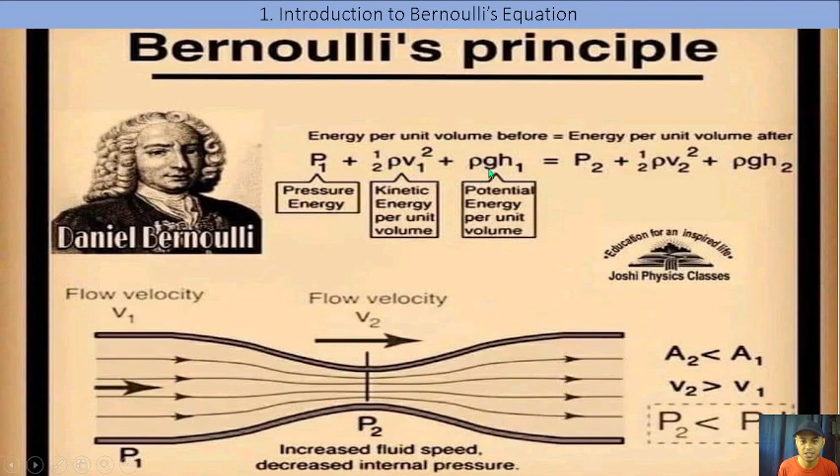So we will be discussing Bernoulli's principle. Grabe ang haba ng mga formulas na yan, pero madali lang naman yan. Depende sa given, di ba? Okay, so we have here pressure. We have density times velocity to the power of 2. We have density times gravity times height. That is potential energy. This is kinetic energy. Then ganun din sa kabila.

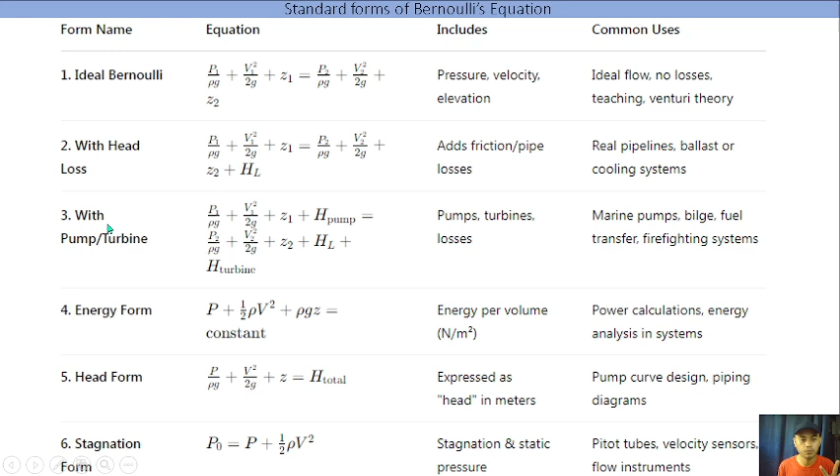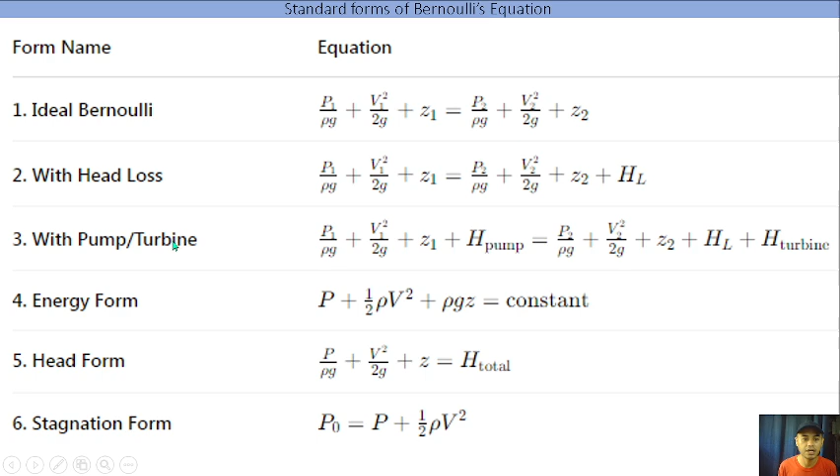Okay. So let's go directly. These are the standard forms of Bernoulli's equation. So on this slide, yung focus natin is dito sa pangatlo siguro. Dito tayo magpo-focus sa pumps. Okay? So this will be our formula. This one, number 3, pump. So pag pump, matatanggal na tong H turbine. Tatanggalin natin yan kasi wala nang turbine. Pump lang tayo. So we will just use this formula for the meantime.

Okay. So, assumptions and limitations of Bernoulli's equation. Kailangan yung fluid is incompressible. The flow is steady. The flow is inviscid. No energy loss due to friction. The flow is along a streamline. Pero sa marine engineering, some real-world conditions such as friction losses and turbulence must be accounted for using correction factors like the head loss equation.

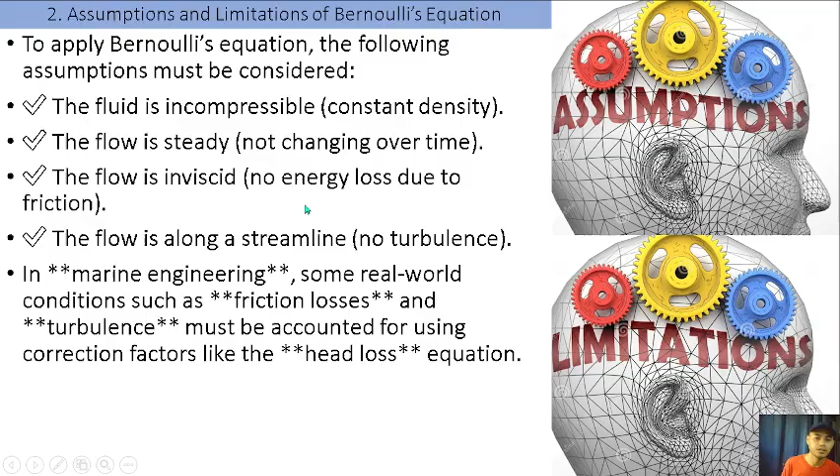Okay. So, applications of Bernoulli's equation in marine engineering. First, for the valve and piping flow. So, yung flow dyan, gagamit natin yung Bernoulli's equation. So, pressure drops in pipelines are analyzed using Bernoulli's equation. Helps in designing marine fuel, cooling and bilge water systems, used to determine flow velocity and pressure losses in different pipe sections. So yung mga losses natin dyan, kailangan natin malaman kung ilan yung flow na dumadaan dyan sa ating mga pipes.

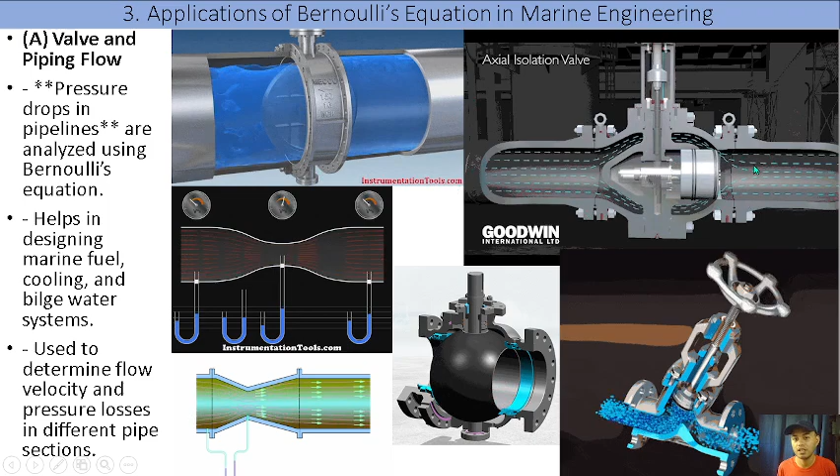Okay, another application of Bernoulli's equation is in pump flow characteristics like this one. So this is the pump. So Bernoulli's principle is used to evaluate suction and discharge pressure. Maybe this is a pump or a blower. So in centrifugal and reciprocating pumps. So helps in calculating net positive suction head to prevent cavitation in marine pumps.

So to calculate for the pump flow natin dito, meron tayong formula which is, we have here the P1 over the density of the liquid times the gravity, plus the velocity, V1 to the power of 2 divided by 2 times gravity, plus H1, ito yung head, or potential head, plus yung malaking H, ito yung pump head. So, given yan, or maybe yan yung isolve natin, depende.

Is equals to the pressure on the discharge, P2, over density times gravity, plus velocity to the power of 2 divided by 2 times gravity, plus H2, plus HL which is the losses. H2 is another potential head. Ito yung head natin. So that will be our formula.

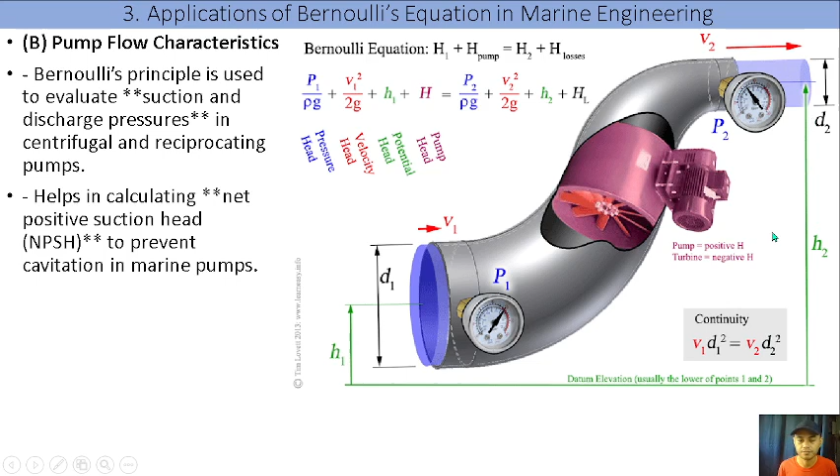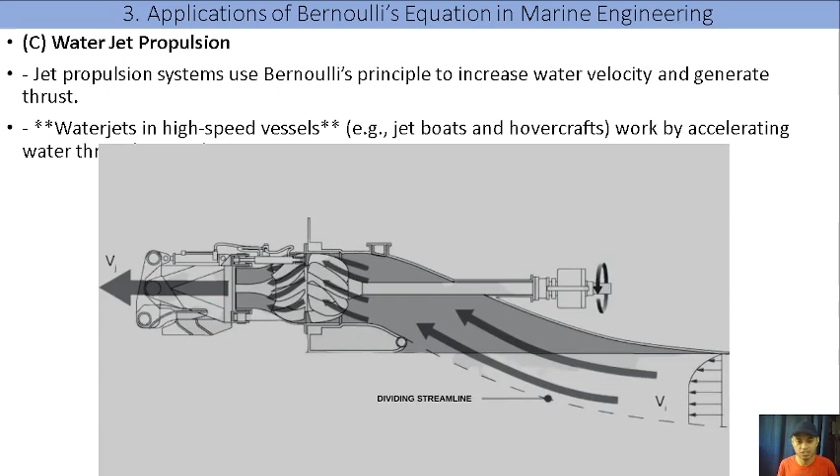Okay, another application of Bernoulli's equation is sa water jet propulsion, ito yung ginagamit ng mga OceanJet, ng mga SuperFerry, SuperCat. Yung mga fast craft ng ferry boats. So, using this one, parang may nozzle dito na paghigop niya, binubuga niya dito at high velocity. Para siyang inipit mo yung nozzle ng fire nozzle natin. So, sisirit talaga yung tubig paglabas dyan.

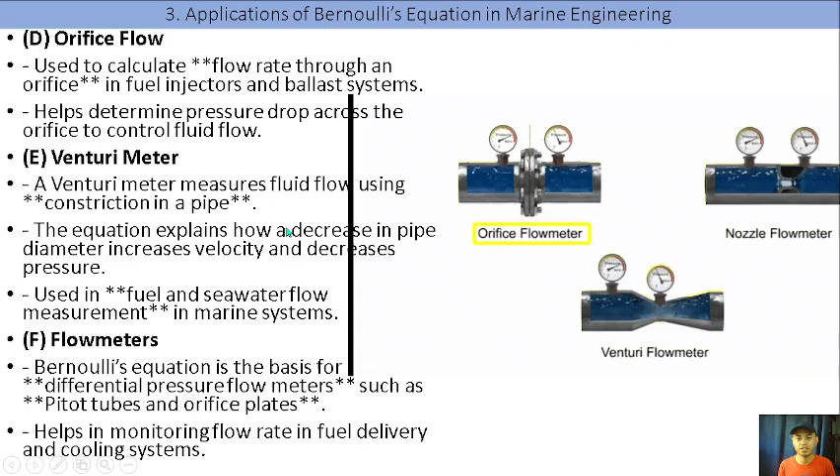Okay, another application of Bernoulli's equation is the orifice flow. Ito yung orifice. For our Venturi meter and for other flow meters. So these are different types of flow meters. Wala ata dito. Maybe sa next slides pa yan. Okay, and the different flow meters, ginagamit din yung Bernoulli's equation.

Okay, so let's continue. Let's start with the formula, problem solving. So this will be your formula, P1 over rho g plus V1 squared over 2g plus H1 is equals to, ganyan. Incomplete na ito. So, ito na lang yung gagamitin natin.

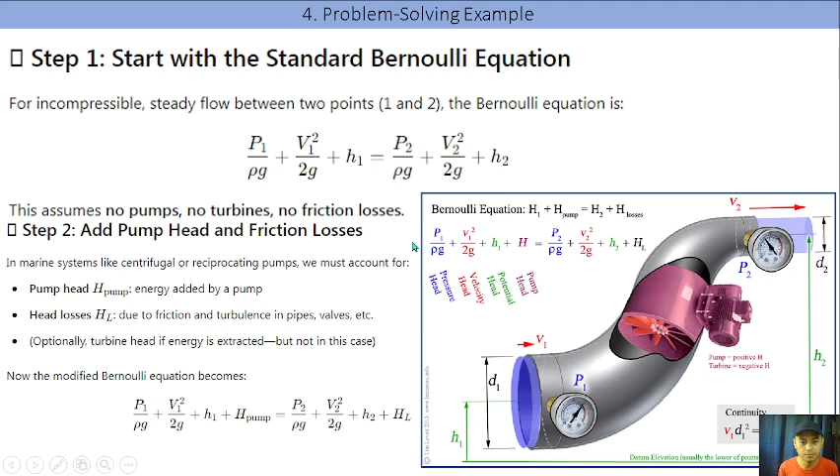Plus H. Okay. So, yung problem natin dito is, let's go. So, these are a problem. We have density of 1,000 kilograms, so this might be fresh water. Gravity of 9.81 meter per second squared. D1, which is ito, diameter ng ating pipe is 0.15 meter with an H2 of D2 diameter outlet, which is 0.10 meter.

Also, we have the H1, this one. H1 yung head natin, potential head, which is 1.5 meter dito. And then, potential head dito sa outlet is 4.0 meters pala. Okay. The pressure here is given naman din, 100 kilopascal. And then, the pressure 2 is also 300 kilopascal. So, given na rin siya.

So, HL natin, yung head loss natin dito, ito HL, losses. Head loss natin is around 2 meter. And then, yung flow rate, volume flow rate natin is 0.01 cubic meter per second. So, yan yung mga given natin. So, how do we solve this? First, we have to get the velocity. So, para makuha natin yung V, we will use the formula Q is equals to AV.

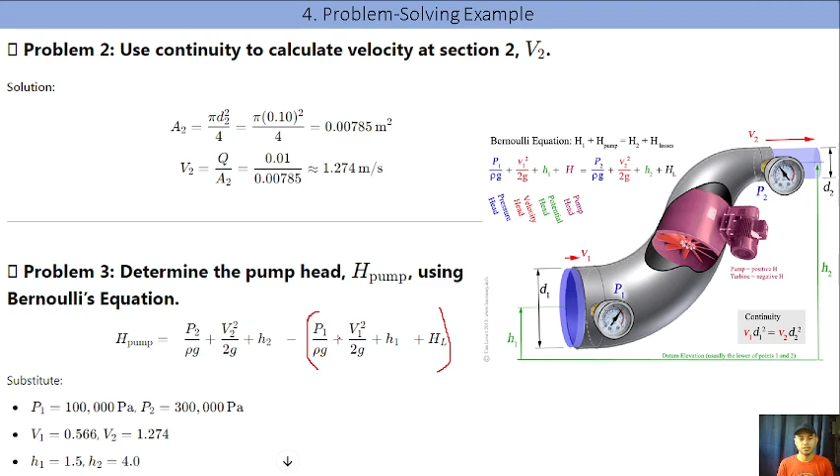So, pag nakuha mo yan, or you will put a parenthesis here. Ano ba to? Wait. Okay, sulatan natin. Okay. Or, kung naka-add yan, lagyan mo ng parenthesis dito. I-add mo yan lahat. Minus mo siya dito sa unang mga. So, and then after that, you compute using the calculator, and then you will get an answer. I'm not sure if this one is correct, kasi walang parenthesis nakalagay. Kailangan may nakalagay dyan na parenthesis. And then, use your calculator na lang to double check if tama ito or mali.

Okay? So, be sure, kailangan i-practice mo yan sa bahay, and then, i-calculate mo talaga using your own calculator. Do not focus on this slide alone.

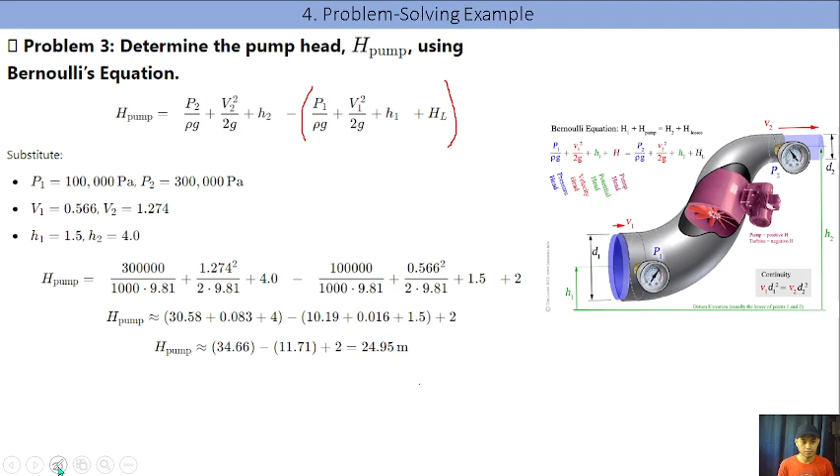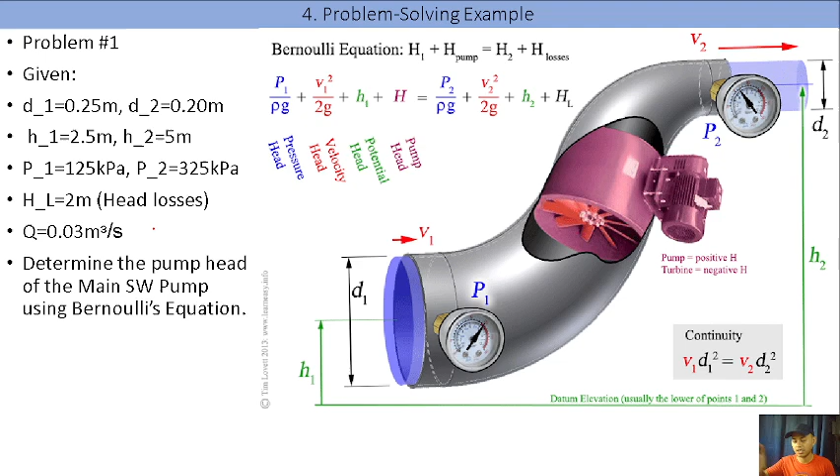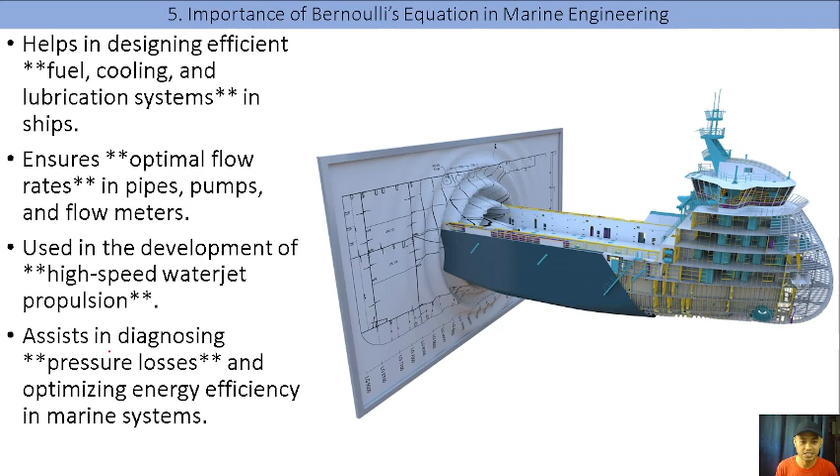Okay, so why is this important? So, the importance of Bernoulli's equation in marine engineering: it helps in designing efficient fuel, cooling, and lubrication systems in ships, ensures optimal flow rates in pipes, pumps, and flow meters, is used in the development of high-speed water jet propulsion, and assists in diagnosing pressure losses and optimizing energy efficiency in marine systems.

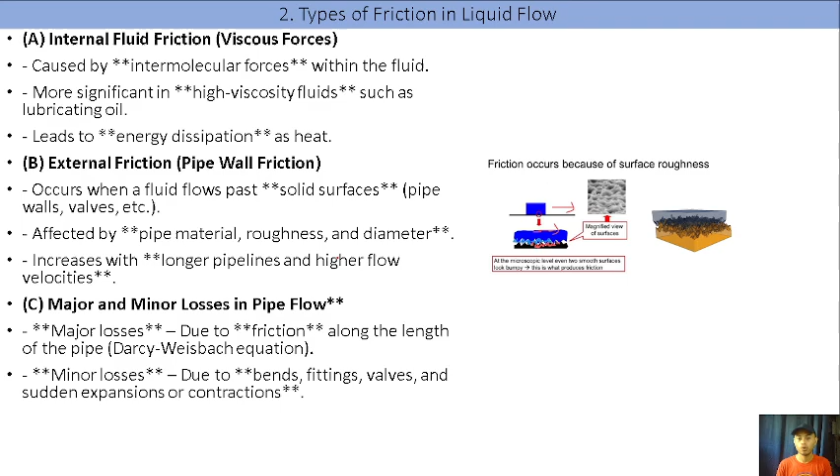So that's it. So I hope you learned something today, and our next video will be on friction in liquid flow. So medyo mabilis lang yung discussion natin.